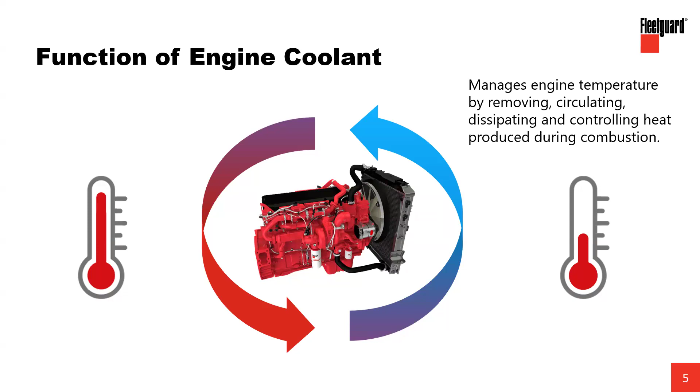Well, with a combustion engine, that combustion process generates heat. And so we need to remove that heat and dissipate it out of the system so that that engine can continue to run. If that engine is not being properly cooled, as many of you know, that engine will overheat and it's going to stop working. Things are going to break. Stuff gets very expensive to repair. So that cooling system is critical in making sure the engine does what it's supposed to do and lives that long, nice, healthy, productive life. So it's all about temperature control and keeping that system free of heat and removing it out of there.

So in order to do that, we've got to have the right combination of ingredients to give us that coolant product that's going to give that right level of performance. And so if we take a step back from the whole coolant conversation, I know some folks, I already had people emailing me saying, 'Can we please make sure we talk about color?'

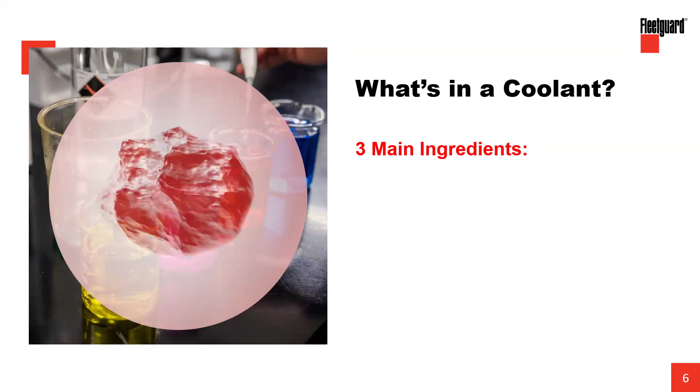Yes, we will get into color. But I want to start at a more basic level, with what's in an engine coolant. It doesn't matter whose product you're talking about, what brand, there are some basic ingredients that make that engine coolant what it is. There are really three main ingredients.

The first major ingredient we're interested in is water. Water on its own is really good at absorbing and conducting heat, so it's one of the predominant ingredients that goes into making a heavy duty engine coolant.

Now, your one watch out here with water is that there are a couple different types of products in the marketplace today. You can buy pre-mix coolant that already has the water mixed in at the appropriate concentration and purity requirements. That is our general recommendation, to use a pre-mix coolant that's ready to use. It takes a lot of the guesswork out of the equation. But coolant companies and blenders also sell a concentrate version of our coolant so that you can mix it with your own water supply.

It's really important to note that if you, or customers, are buying concentrate coolant and mixing it yourselves, water quality is very important. Don't assume that just because the water is safe enough to drink, it's going to give you the right performance outcome when mixed with a concentrate product.

Tap water has lots of different things added into it. I live here in Middle Tennessee, where we've got a lot of limestone in the ground, so generally our water supply is very hard. When you think about scale buildup around your faucets or shower head, that's an indication of hard water. If you're mixing hard water in with your concentrate coolant to get that final product, it can have some negative effects on performance. So water quality is very important, and that's generally why we recommend pre-mix.

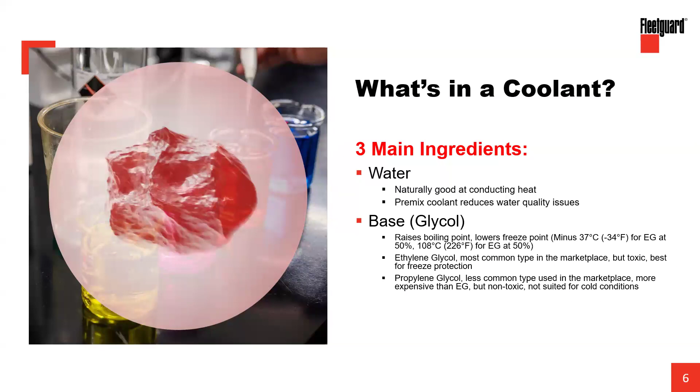Then the second ingredient we're interested in is the base, or glycol. If you've ever heard glycol referenced around heavy duty engine coolants, this is what we're talking about. It's the base of that coolant product. What the base, or glycol, does is take the natural boiling point of water and raise it, and take the natural freeze point and lower it. So it's giving greater thermal range to the capability of that coolant product. That's really about extending the limits of the temperature that coolant can see.

There are two main types of glycol, or bases, used in coolants today. The most common by far is ethylene glycol, or EG. If you've ever been looking at a coolant label and seen EG on there, that's just specifying the type of base being used. It is toxic, so that's the downside to an EG coolant, but it does offer the best freeze protection. If you're in an extremely cold weather area, an EG coolant is going to fare a little better than the alternative.

The alternative is a propylene glycol coolant, or PG coolant. They're typically less commonly used, and PG coolants are usually a little more expensive. They are non-toxic though, and that's the differentiator. Certain industries, such as food and beverage haulers, may have a requirement to use a non-toxic coolant product. Will and I visited a fleet this summer down in Dallas, Texas, that will be using a propylene glycol coolant because they haul food and beverage products. So there may be specific customer requirements that dictate needing a PG coolant. That's the main difference between those two.

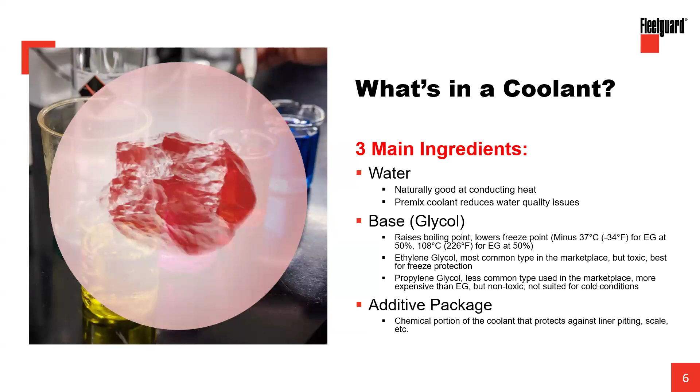That third ingredient is really a package of ingredients referred to as the additive package. This is where the chemical protective qualities of the coolant come into play, keeping the engine from experiencing chemical reactions that can negatively affect its life. This is also the ingredient that's going to be most different or unique between one brand of coolant and another - think of it as the secret recipe, the secret sauce of the formulation. There are certain things that additive package is designed to protect against, things like liner pitting and scale. We're going to look at a few examples here.

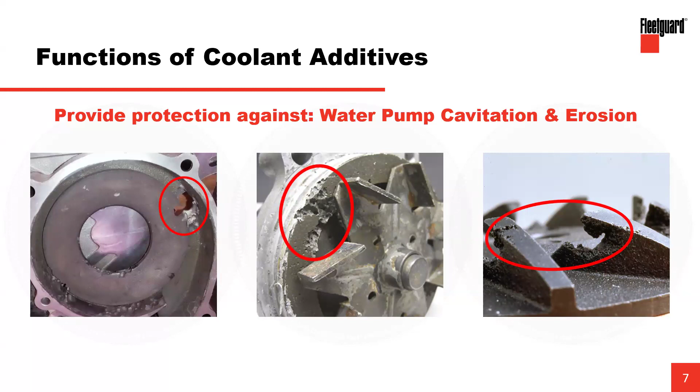One thing you should have protection against is cavitation and erosion, particularly with water pump components. If you've ever seen water pump impellers or housings where it looks like little bites and chunks have been taken out of the metal, that should be a red flag - an indication that the coolant product being used wasn't providing the adequate protection needed to keep that system healthy. What happens is as these impellers spin and circulate coolant, little bubbles form in the system, and they pop and implode on the surface of the metal, and under pressure take little bites and chunks out. If you're using a coolant formulated appropriately, that shouldn't happen.

That's something that's going to be protected against - those little bubbles will still form and burst, but there's a chemical coating that creates a barrier so they don't take little bites and chunks out of the metal over time. So if you're seeing a lot of this, or experiencing a common thread of premature water pump failures, that could be an indication to start asking questions about the coolant product you're using.

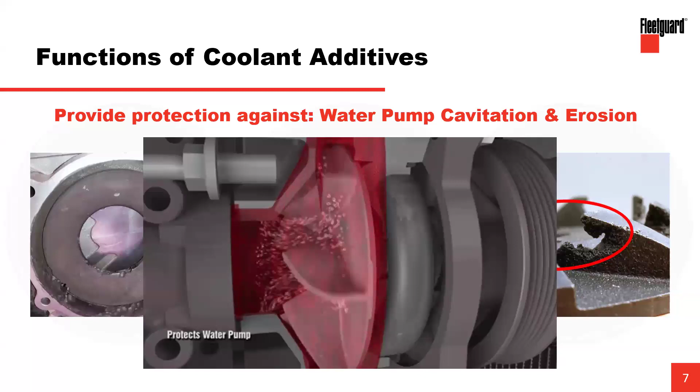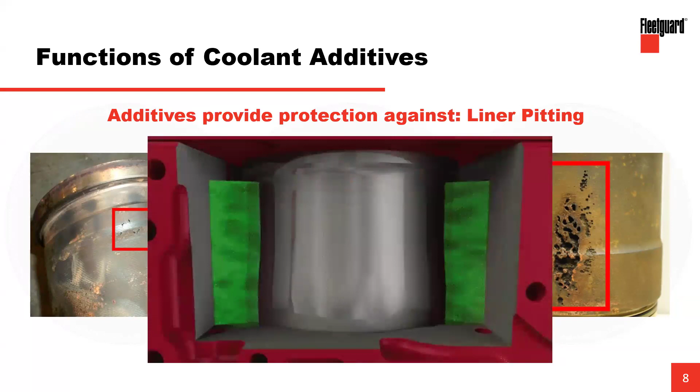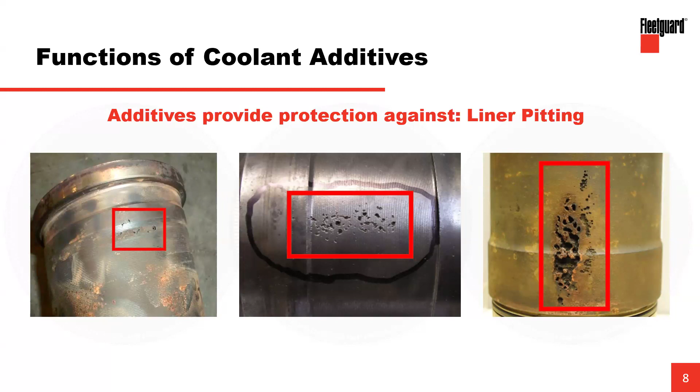Another thing we mentioned is liner pitting. This is a similar situation where by nature of the combustion process, you get vibration inside the engine, and on the cylinder walls you get a little bit of those same bubbles forming and bursting on the surface. If not protected against, that will continue over time, and you can actually eat your way through the metal, and then things start to mix - oil and coolant and so on. That could be an indication you've got some sort of failure occurring as a result of not having the proper protection from the coolant product being used.

So a couple things to watch out for. A question I'd want to know is: do these additives wear out? Are they being used up through the life of the coolant? And the short answer is yes - coolant does have a useful life, just like engine oil has a useful life.

Over time, as engine oil starts to break down because of oxidation, that oil used to keep contaminants and things we don't want in the engine in suspension. Over time, when those additives deplete and wear out, that's when your oil starts to clump up, clog up, and agglomerate into what you'd commonly refer to as engine sludge.

Similarly with your engine coolant, that additive package can wear out over time, and you need to make sure you're taking care of that coolant product. There are concentrated coolant additives called SCAs, or supplemental coolant additives. If you've been using Fleetguard products over the years, you'll commonly see those referred to as DCA, or diesel coolant additive. These are concentrated additives you can put back into the cooling system to recharge or replenish that add pack and keep that coolant protecting the system the way it's supposed to.

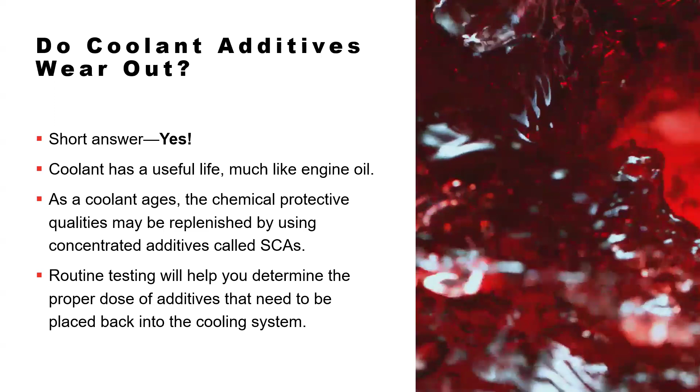Now, if you're not testing - and we know the industry isn't necessarily the best at staying on top of testing and maintenance - you really don't know what's happening inside that system. You don't know if you need to replace or replenish those coolant additives until maybe you start having problems. So we definitely recommend routine testing - that's really the only way to know what's happening inside the system, and it'll tell you exactly how many of those additives to put back in if you're using a coolant that requires these concentrated additives.

And if you're just guessing, is it possible you might be wondering, can I put too many additives back in? You can, yes, absolutely. This is an instance here on the left. You may have seen this if you've been around the industry a long time, where you see this gel-like substance forming up either in the water filter, the coolant filter, or possibly in the radiator parts of the cooling system. This is a result of too many additives in the system. So if we're just guessing and pouring concentrated additives back in the system without doing the math to understand how much we need, you can see something like this happen.

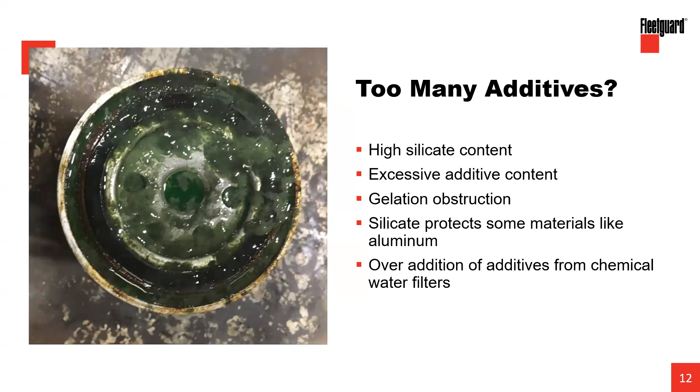Basically what's happening is like when you were a kid making a pitcher of lemonade, or I'm a 90s kid, so Tang was around when I was a kid. You can only put so much of that powder in solution in the water before it's no longer soluble, and it starts to clump up and agglomerate at the bottom of the pitcher. Same thing if you're making coffee. You can only put so much sugar in that coffee before you're just going to have sugar sitting at the bottom of the mug. So that's basically what we're talking about here, and if you've ever seen that, that's an indication we're putting too many additives back in the system.

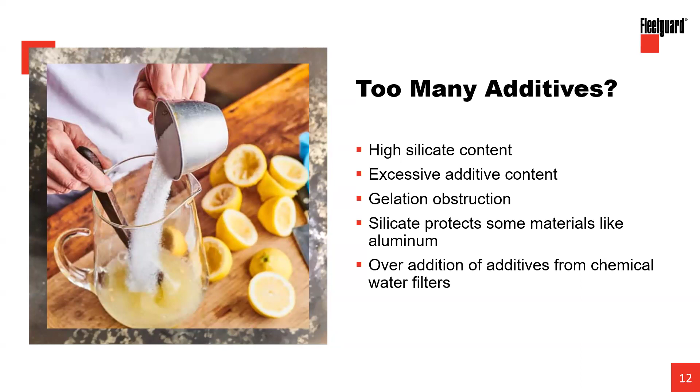So let's get right to it. Color. I literally had somebody email me before the call saying, please make sure you talk about color today. So if I were to ask you guys, feel free to drop in the chat, which coolant color is the right coolant color to be using in a modern diesel engine, what would you guys say? I'll give you a second to put that in the chat window or the Q&A window. All right, I got one vote for blue. Any other guesses?

All right, well the answer, of course, is any color, right? Color doesn't really matter. I see red, I see 'depends on the manufacturer.' Yeah, color doesn't really matter all that much. Color is not standardized across the industry, and many different manufacturers will use different colors depending on the application and the type of product being used. So it can become a very dangerous practice to service and maintain diesel engines based on color alone. If a vehicle comes in and has orange in the system, is it safe to just put any orange back in? Not necessarily, right? I would say that's not a good best practice. There are a few things you'd want to know, like looking at the label of the product or the safety data sheet, to really understand: is this the right product I should be using, and is it compatible with the product that's supposed to be in the system?

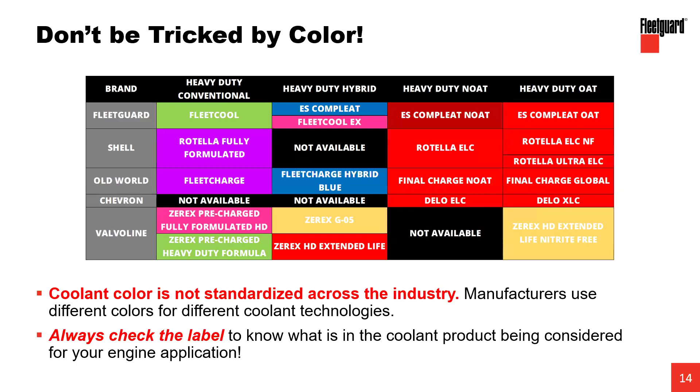We're going to talk about a few of those things today just to level set and give good objective information for the next time you choose a coolant for your application, or help a customer find the right one. There's a few things to look for. I've got on the screen a few brands that are out there in the marketplace today, specific to North America. You can see sometimes there's a little bit of consistency with the color across types, but it's not really something that's reliable. This is another look from a document I got from one of our OE friends here in North America, and you can see, based on the columns running top to bottom, the different types of coolant products and the different colors out there. You'll notice the variety of makes and types of coolant in the marketplace, but certainly a variety of colors as well.

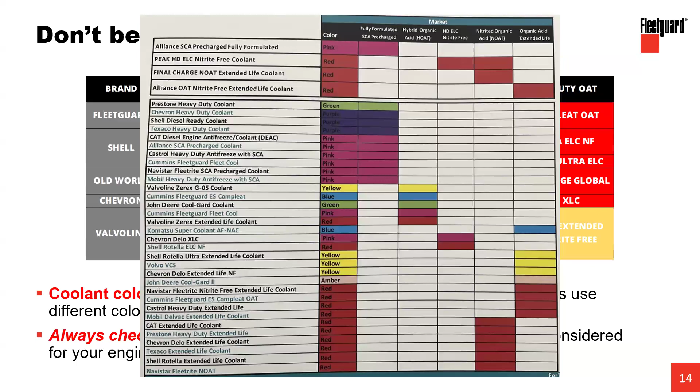And so, just going on color alone, not a good best practice.

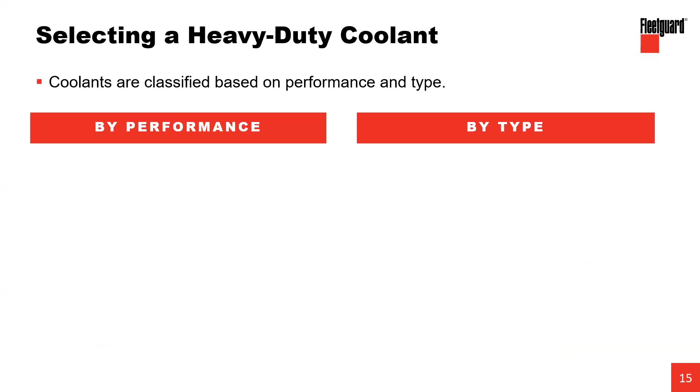So a couple of ways we can look at all of those coolant products that are out in the marketplace today and break them down is by looking at them one of two ways. One way is by performance, which we're going to come back to, but the other is by type.

These are just generic names, generic terms used in the marketplace today to group coolants based on the technologies used and the way they're formulated. So a conventional coolant, also called a legacy coolant. You get into hybrid coolants, also referred to sometimes as ELC, or extended life coolants. And then the more modern types with organic acid technology coolants, or OAT coolants, as they're often referred to. There are some variations of those out there as well. But this is a way to talk about technologies, these type names.

Performance specifications, though, we're going to circle back to that and get into that next. These are actual specifications that tell what type of coolant it is or where it's compatible, based on actual rules and specifications. So there are industry specifications. One of the governing bodies out there is called the American Society for Testing and Materials, or ASTM. They would be similar to an ISO group out there, or SAE group. They don't just work with coolant; they work with all sorts of different things. But they set industry standards, and we're going to look at one of those ASTM numbers next.

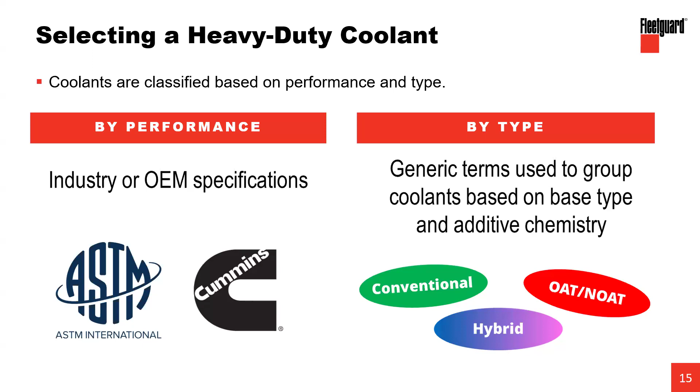Cummins, though, just like Cummins or Detroit or Caterpillar, any of these engine OEMs, people that actually manufacture engines or powertrains, they often have their own specifications as well, which build on top of an industry spec. So let's go look at those next.

So again, this is an industry specification, the industry specification for a heavy duty diesel engine. What this says is, hey, this coolant has been formulated and meets all the requirements of a heavy duty diesel application, and specifically calls attention to protection against liner pitting and that scaling that we talked about, things that are common to heavy duty diesel engines. So this is the bare bones minimum spec, regardless of what brand or type of coolant you're using.

If it's a heavy duty diesel engine, you need to look at the label of that product. Look at the jug. Look at if it's coming in a drum or tote, or again, if you can look at the safety data sheet. If you do not see D6210 anywhere on that, that should be a red flag that, hey, this product may not necessarily meet, or probably doesn't meet, the industry specification for a heavy duty diesel engine.

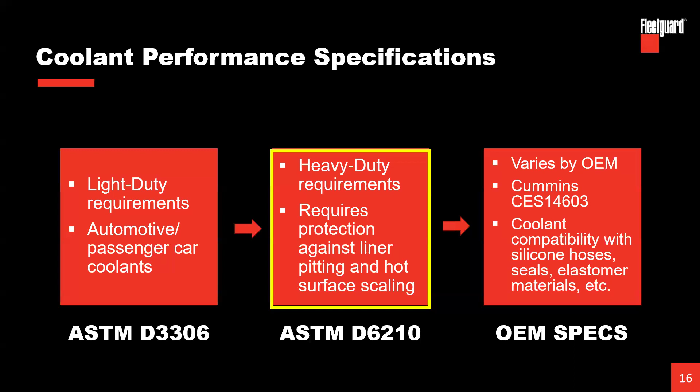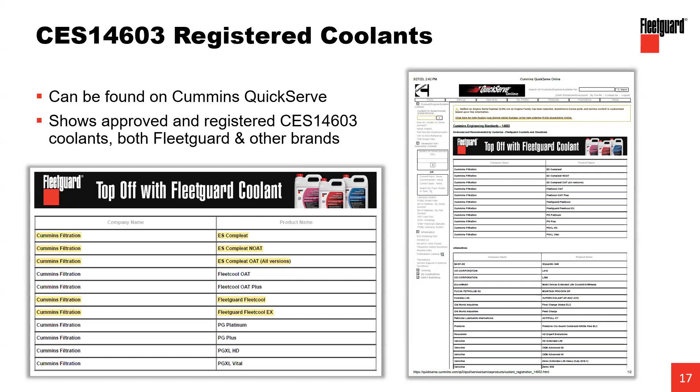So, where would I know to go look for a list of coolants that do meet that Cummins CES 14603 spec? You can actually go find this out on Cummins QuickServe. I know we've got quite a few folks on the call from the Cummins channel here in North America, across US and Canada. If you're not sure where to look, reach out, we can get you pointed in the right way. There is a list of products, not just Cummins, not just Fleetguard products, but all coolants that are registered to meet that specification. That would be a place you could go look.

So, why does Cummins call attention to compatibility with silicone materials? This is one of those things you can look for on the label of the product, look for on the safety data sheet of the product. It is one of the ingredients that is commonly used in formulating that additive package we talked about, right? That third ingredient, the additive package with different ingredients, this is one that's often used out in the industry today.

It is called 2-ethylhexanoic acid. I know that's a mouthful. Learn that, that's a good $64 word you can use at your next dinner party to impress your friends. 2-ethylhexanoic acid, what's the deal here? Why is it not recommended? Well, it's known to be extremely aggressive on silicone materials, which are often used in modern diesel engine cooling systems.

So when you think about hoses, head gaskets, seals, all those things we just talked about in the Cummins specification, 2EH is really aggressive on that stuff. Silicone is a material which is an elastomer, it should be nice and flexible and bendy. And 2EH essentially goes to work on that material and causes it to lose that flexibility and causes it to kind of shrivel up and shrink up.

Some red flags would be if you've ever seen any of these materials, hoses especially, that have a lot of cracks and start disintegrating basically from the inside out. That would be a red flag to know, hey, the coolant I'm using, does it have 2EH in it? And should I be avoiding that? Something to be on the lookout for.

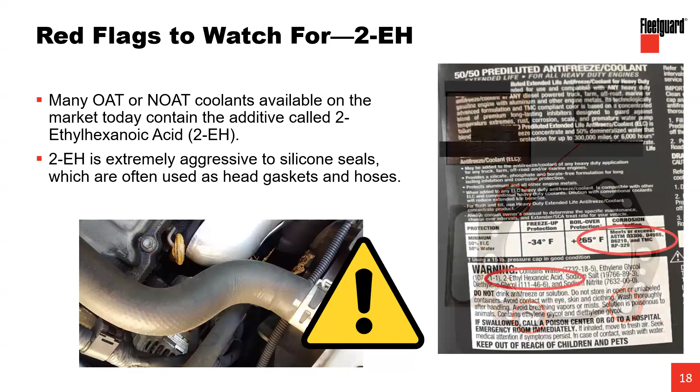Again, this is one of those things you can look for on the product label. Sometimes it will actually be listed in the ingredients. Sometimes the coolant company, the blenders, the people selling the product, will try to be a little trickier with it, where they'll say proprietary ingredients, and you can kind of dig into that a little bit more, and that's where you'll find 2EH. Will, feel free at any point if you want to drop in the chat some notes on any of this stuff, I think that's helpful for everybody as well.

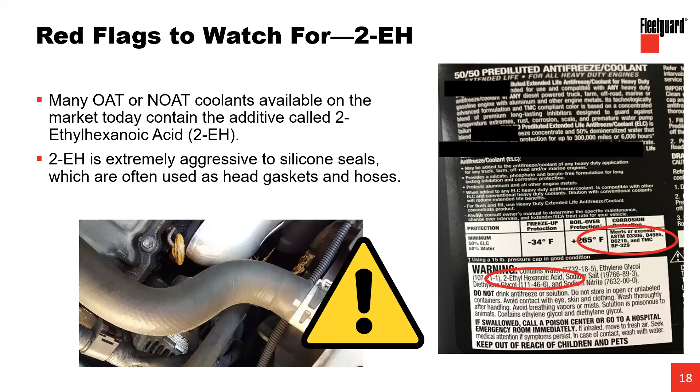Another red flag, something else we see very prevalent here in the North America market, is recycled coolant. Hopefully you guys have not run into this stuff before, but this is something we do see in the North America market. Typically these are being sold as very low cost solutions. One of the other things we often see with these are generally smaller companies that will approach customers offering to take away their used fluids, their old oil, their old coolant. And when they do that, they're basically taking it back and not really properly going through the actual steps to recycle the coolant and make it usable again in the future.

So if you can imagine one of these operations going to a dozen different sites, taking everybody's old coolant, going back and basically putting it into the same pot, not really handling that properly, and then redistributing it, you're not only not getting the things you need in that coolant product, you're also getting a compounding effect of all the negative stuff batched together from all the other customers they're picking up from. It really is a nightmare product.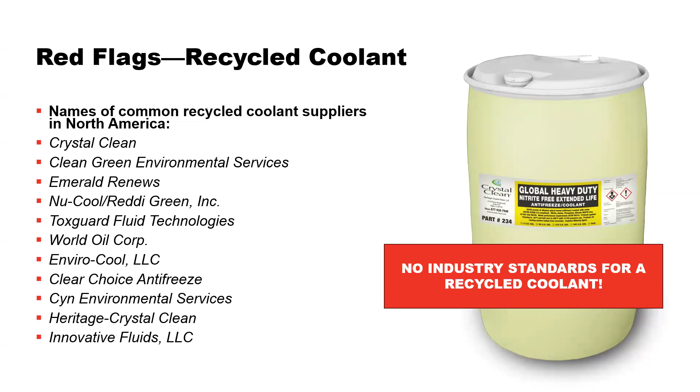What are some common issues that can happen if you're using one of these? What we see, some of the things listed here on the screen: premature failure of things like radiators, EGR coolers, other components that have aluminum as part of their composition. As we mentioned with the 2EH, silicone materials, so hoses, heater hoses, seal failures, head gaskets, we typically see that. Water pump failure is something we usually see with recycled coolant.

You've got rapid pH drop, which is an indication that the coolant is becoming overly acidic. And once it's got a lot of acid content in there, the acid's going to start going to work on your steel and cast iron components. So if you start noticing the color of the coolant changing to kind of a brown rust color, that might be an indication this is taking place inside the cooling system and inside the engine block. And of course, once you get to that catastrophic engine failure level, you're talking about total engine rebuilds. Very, very, very expensive.

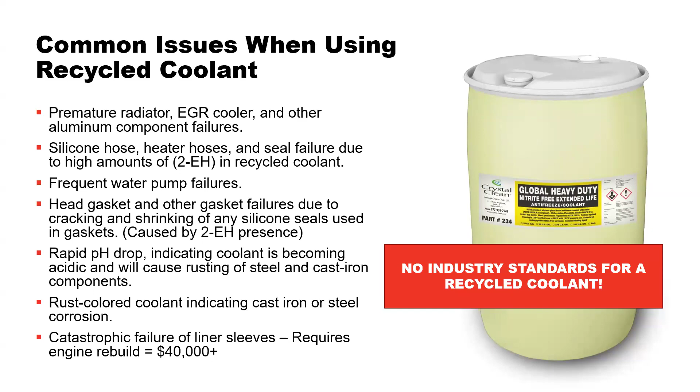Something else to watch for: we know folks out there tend to be very price sensitive, cost sensitive, looking at the top line of their business trying to reduce cost. So sometimes we still see these legacy coolants out there classified under an industry standard, but a different one than what we're interested in, the D4985 standard. This is basically the old school way to get a heavy duty engine coolant, an automotive grade engine coolant that you have to add supplemental coolant additives to at the first time of use to turn it into a heavy duty engine coolant.

And so what a lot of folks do, it's just like when we were in school, we start working on the worksheet before we actually read the directions, people will see heavy duty on the label and just pour it right into the cooling system and go off to the races. They start their engine and go, and they have not actually done what they were supposed to do to turn it into that heavy duty engine coolant. Now they think they're getting heavy duty protection when they're really getting light duty protection.

OEMs do not use this stuff today, they have moved on from this. So the recommendation here would be you really should move somebody away from this if it's a product they're still using. Again, this is something you'd be able to look for on the label, that D4985 specification. If you do not see D6210 anywhere on there, that's something you'd want to pay attention to and know this is not really formulated to be a heavy duty engine coolant.

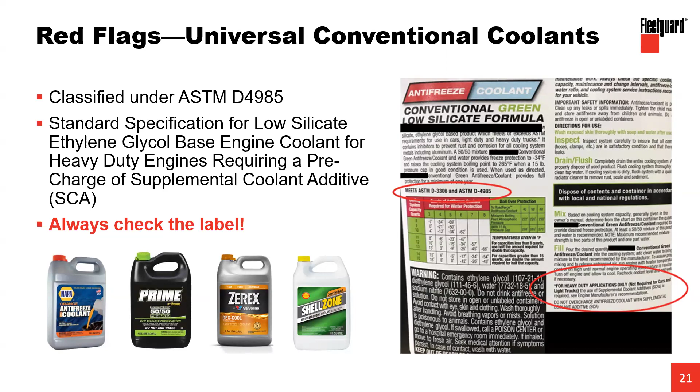All right, so we've talked about specifications, we've talked about some things you can look for. Let's talk about coolant types and continue to break that down a little bit. So conventional coolants, right, these are oftentimes also referred to as legacy coolants.

Generally speaking, these are still kind of your green coolants that are out in the marketplace today. Over the counter pricing usually is the lowest, so oftentimes people are using these because they're either familiar with them since they've been around the industry a long time, it's what they grew up on, or somebody else educated them, and it's cheap. These are coolants that, while they can be useful, you can still use today.

We sell a conventional coolant with our Fleetcool product. They do require a lot of hand holding, so they typically have the shortest service interval and require more maintenance than other types of coolants. If you really want to get the benefit out of these products, you really have to watch them a lot more closely. From what we've seen throughout our experience in this industry, most people are not watching their coolant maintenance very closely, so probably not the best solution. From a technology perspective, there are better technologies out there.

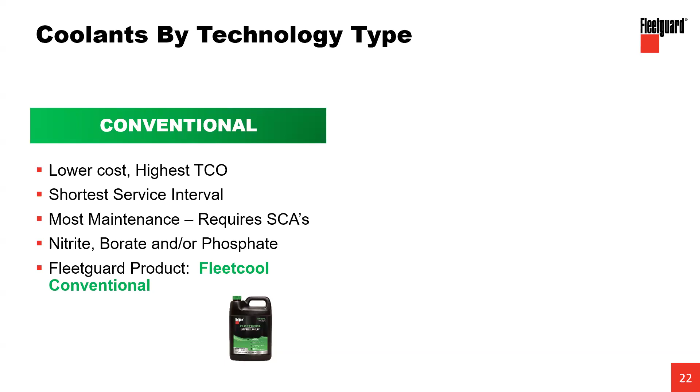That moves us up to our next category, which are called hybrid coolants. Sometimes they're referred to as ELC, or extended life coolants. They're a pretty significant jump up in terms of technology, protection and life compared to a conventional coolant, but there are even still some better options out in the marketplace today. The reason they're called a hybrid is they take some of the good things about a conventional coolant and blend them with some of the other technologies out there, and that's where you get a little bit of that hybrid name from.

The Fleetguard coolant products that fit in this category would be your ES Compleat. For those folks who have been around Cummins engines a long time, and maybe around Fleetguard a long time, who know of the blue coolant, that is our ES Compleat coolant. We also offer a Fleetcool EX product. That's maybe a little bit more of a niche product for kind of legacy Detroit engine applications, but both of those fall into our hybrid category.

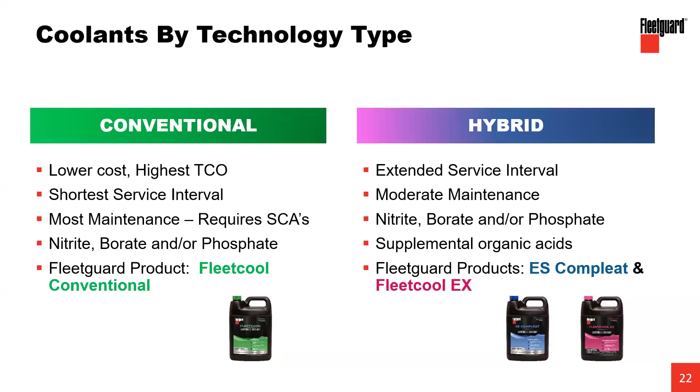That moves us into our organic acid technology coolant. I think somebody dropped in the chat what NOAT stands for - that's a nitrited organic acid technology coolant. The two products we offer in the OAT family today are our ES Compleat OAT - that's the product on the right - and then we have an ES Compleat NOAT, which again is a nitrited organic acid technology coolant.

The nice thing about an organic acid technology coolant, and why OEMs are factory filling with these today, is they offer really the best protection in terms of that additive package we talked about. They also offer the longest life and really the least amount of maintenance. So as you think about whether you want a product that's maybe cheaper on the front end but requires a lot to get the performance out of it - that's what you see more on the legacy or conventional side - versus these OAT coolants on this end of the spectrum: yes, they're a little bit more expensive, but in terms of life of the product you get a much longer lasting product, one you don't really have to babysit very much, and it gives you really great performance in terms of protection.

One thing to point out here on the nitrited OAT, the NOAT coolant, you'll see it's EC1 compatible. EC1 is that Caterpillar performance specification - we talked about those OEM specs earlier, and CAT's is EC1. So that NOAT coolant was something we formulated really to provide benefit for anybody using CAT engines who wanted a Fleetguard coolant that would be compatible.

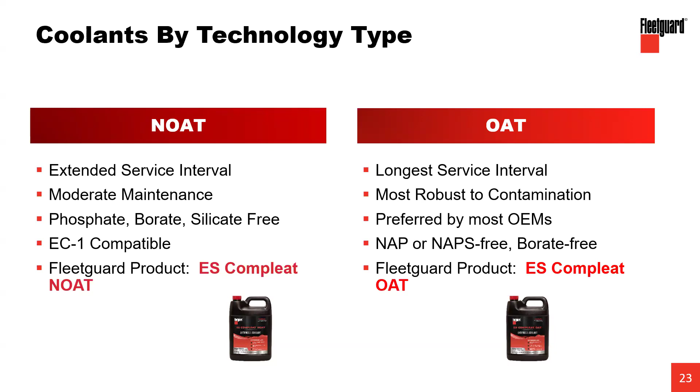These are all heavy duty right out of the container. They all do meet that industry standard, that D6210.

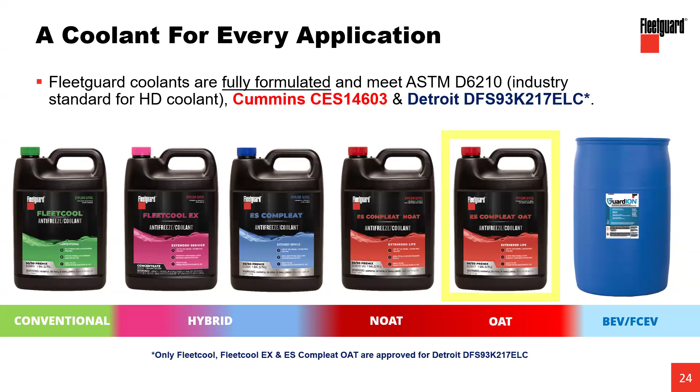So just to talk a little bit about ES Compleat OAT, again, I think there's a lot of benefit in using this product. It is a 1,000,000-mile life of the engine coolant, in off highway space, 20,000 hours. And the kicker here is you do not have to use any supplemental coolant additives or extenders with that product. So in terms of a product where you can kind of just top off and go, this is a product that you would do that.

So we're going to talk on the maintenance side of things in a few minutes about test strips and adding SCAs back in and all that stuff. And if all of that sounds confusing, or maybe is too much hassle, just use ES Compleat OAT, and you don't have to do that stuff. So it kind of makes life a little bit easier.

One of the other things we really like about it, you'll see that first red line across the screen, suitable for all makes and all models. This is a coolant that, because of its formulation where it is nitrite, amine, phosphate, silicate free, it does not have 2-EH in it. It's borate free. This is a coolant that is formulated to work very well across light duty, medium duty, heavy duty, high horsepower. You could put this in a passenger vehicle, automotive type application. Works really well across the board.

And the main reason for that is it's formulated to be very compatible with aluminum. So as we're moving to a little bit lighter applications, even on the heavy duty side of things, there's more aluminum being used. So we talked about heat exchangers, all those types of things. This is a product that works really well with that.

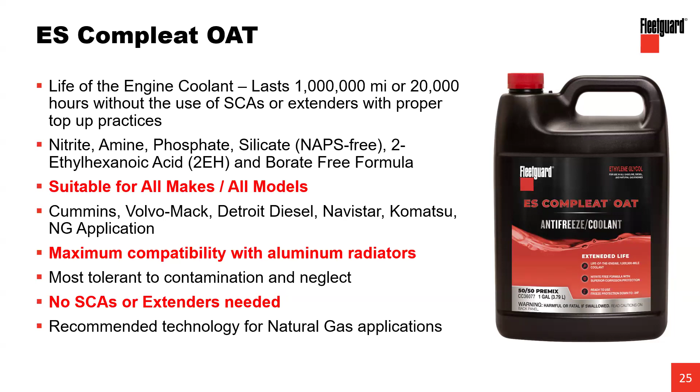And so we've seen a lot of benefit for customers that may have been carrying multiple types of coolant in their shop, because they're taking care of several different, they've got kind of a mixed fleet of vehicles or mixed fleet of equipment, forklifts, skid steers, all kinds of different things. This is one that you can basically consolidate all that inventory down into one product and use across the board with all of your applications. So it makes life a lot easier. Really a great product. We could talk more about that. If you've got more questions on our ES Compleat OAT, that's a product we really like, and we've seen customers get a lot of benefit out of using and switching over to.

So we're going to shift a little bit, pivot here with a little bit of our time and talk about maintenance. So let's get back to what we talked about earlier with, do coolant additives wear out? Do they deplete? The answer is yes, like we said, they do over time. So if you're using a coolant that does need to be replenished with supplemental coolant additives, you can buy concentrated additives. So these are some of the part numbers we've got here on our screen from a Fleetguard perspective.

So again, we've got those DCA or diesel coolant additive products. DCA2 is what you would use for Fleetcool and Fleetcool EX, or if you're using a coolant that has nitrite in it.

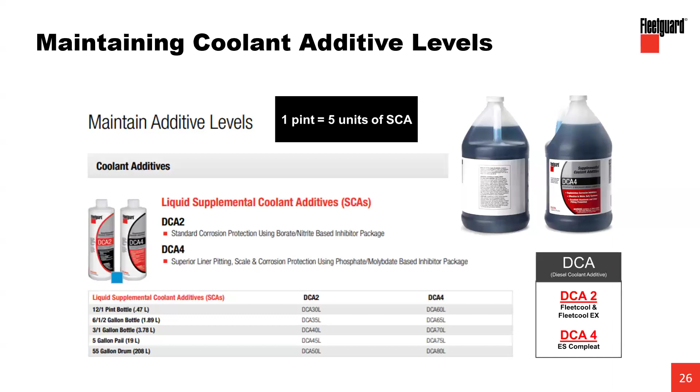DCA4 is the product you would use for our ES Compleat or our blue coolant. That's one where you'd be using a phosphate or molybdate inhibitor package. But if all of this sounds like a lot to keep up with, and you're not sure exactly what you should be doing, if you move over to ES Compleat OAT, you don't have to worry about this stuff at all. It kind of goes out the window.

So how often should I be testing to know if I need to be adding SCAs back into the system, or what's going on there? How often should I be testing? This kind of points out the differences between these types of technologies.

If you're using one of those conventional or legacy coolants, really you should be testing at every oil drain. So that could be pretty frequent, depending on what that drain interval looks like for your application.

If you move up to one of those hybrid or extended life coolants, that number jumps up to about 150,000 miles. That's 240,000 kilometers, 4,000 hours, or annually, whichever comes first. So a pretty significant jump there from a conventional to a hybrid.

But then you can see the real benefit of using one of those organic acid technology coolants, where that number jumps all the way to 300,000 miles. So we don't even need to test it until we get to 300,000 miles, or 480,000 kilometers. So really a significant jump there.

If you hit those numbers before the course of 12 months rolls over, then do that. If it's a static piece of equipment like a gen set or something like that, at least once a year you should be testing that system to see what's going on inside.

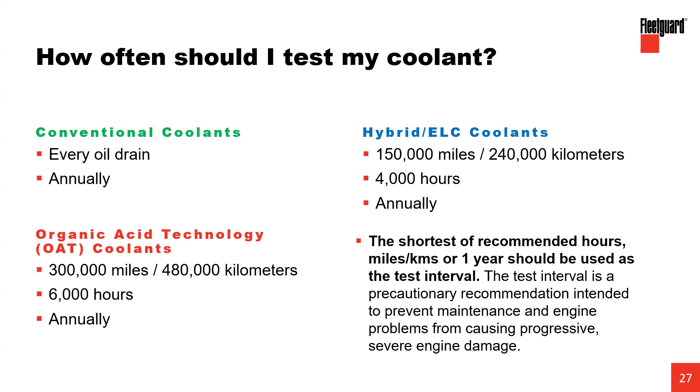So how do we actually go about the testing process? A couple of things that you can test for. One of these here is our Quick-Chek three-way test strip. Really the main thing we're testing for in this test is pH.

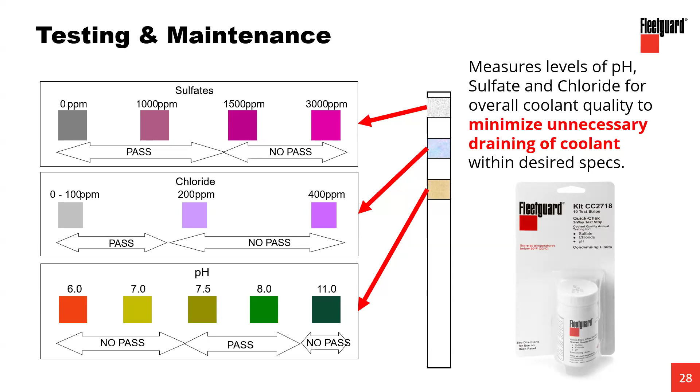We mentioned about the system becoming too acidic earlier. Well, it could become too acidic or it could become too basic. If it's not in the middle of where that should be, it's not good on either side of the equation.

This is really kind of your canary in the coal mine test. So think about maybe you've got a piece of equipment that has not been tested in a long time, or you bought a used truck or used vehicle or used piece of equipment. You have no idea what's in the cooling system, but you're not necessarily wanting to drain the system out and replace. You can test with this Quick-Chek test strip and see what the pH looks like. And if that pH is out of balance, if it's way out of spec, you really are in a drain and replace situation. So rather than going through a bunch of other things, just start here, and that pH will tell you what you need to do next.

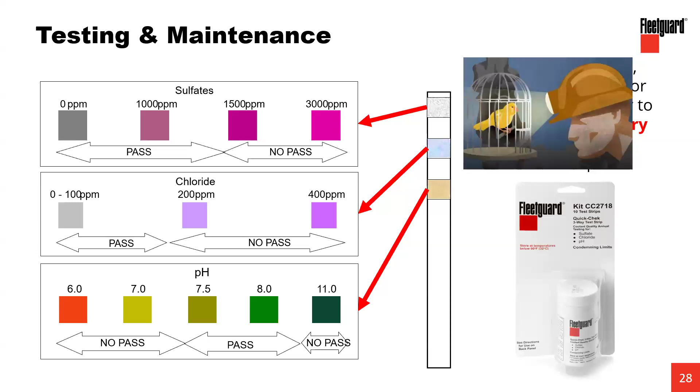Beyond that, we've got a YouTube video that walks you through exactly how to do that in about 3 minutes. Super easy. The next thing you can look at is water quality.

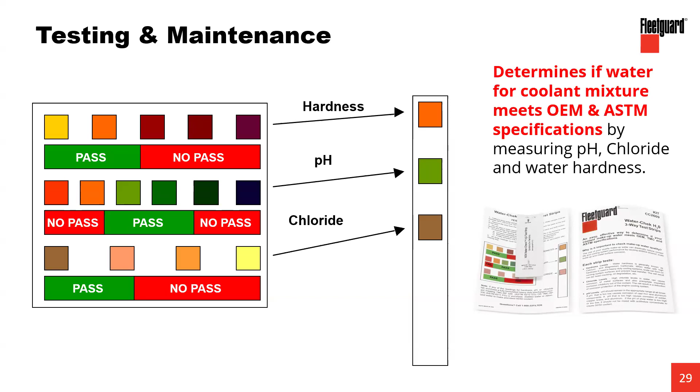Let's say you are a customer, or you've got customers that buy the concentrate coolant and want to mix themselves. They really should be using these test strips. These water quality test strips are going to test water hardness, pH, and chloride. It's just a simple pass fail, and that's going to tell you whether this water is safe to use in mixing with that concentrate product to get finished good coolant.

Again, there's a YouTube video, less than 2 minutes. It's going to tell you exactly what to do.

So pretty handy there. This would be used on any coolant containing nitrite, not necessarily limited to just Fleetguard coolants with nitrite. These are going to work pretty well with other coolants that have nitrite in them. Again, the YouTube video will walk you right through that process, and it's pretty straightforward.

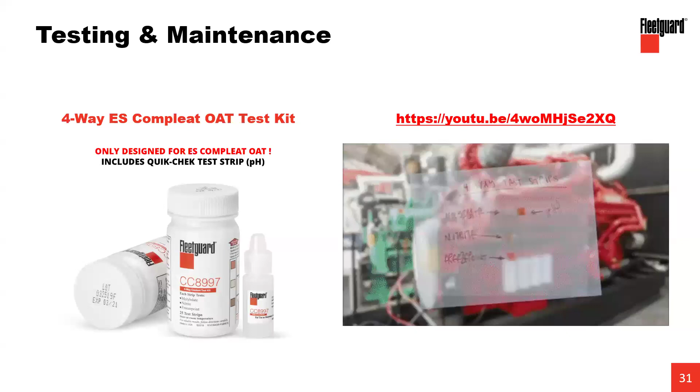Now, let's say you are using our ES Compleat OAT. There is a 4-way test strip kit that comes with that. It's testing, again, for freeze point, nitrite, molybdate, and it's also testing for pH. So this one kind of does it all. This is really specific to ES Compleat OAT because OAT coolants are a little bit more unique in the marketplace.

We can't verify that this is going to work great with other people's OAT coolants, but it definitely will work with our ES Compleat OAT because that's what it was formulated to do. So the YouTube video, pretty straightforward, will walk you through exactly what to do there. Makes the process really straightforward and simple.

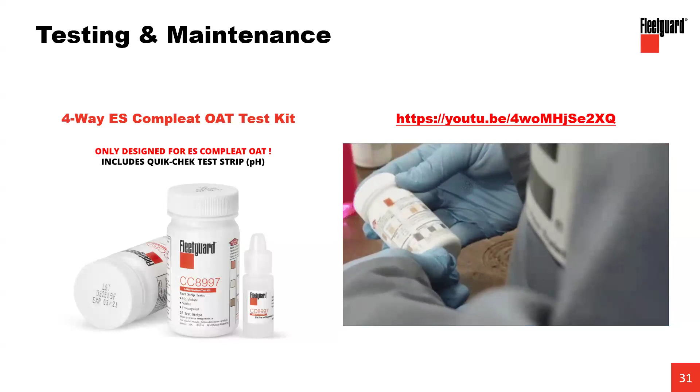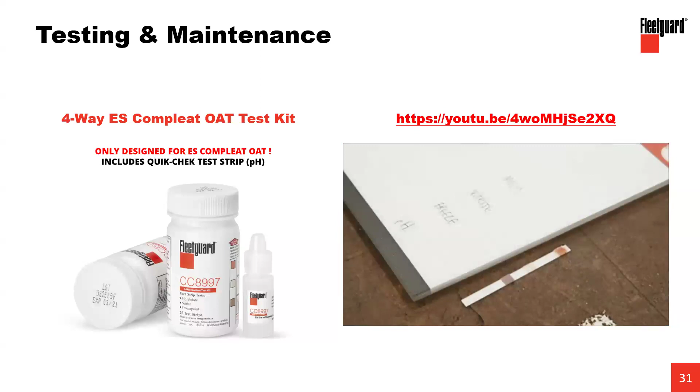And again, when you use this, it's really just telling you, hey, do we need to add more coolant back in the system? Top off with new or dilute, whatever we need to do there. But we're not going to use any supplemental coolant additives, so it kind of takes all that stuff out of the equation. That would be one thing to pay attention to with ES Compleat OAT.

And then the last thing I've got here is, from a testing and maintenance perspective, the refractometer. If you've never seen one of these little guys, but you live in a cold weather climate, somewhere where it gets really cold during the wintertime, a lot of snow, sub-zero or sub-freezing temperatures, that kind of thing, we really do recommend that you should have one of these and know how to use it.

Basically, what you're doing is taking a little sample of your coolant and putting a little droplet on the lid there. You'll flip the lid down, and then you look through the viewfinder side of it, kind of like a little scope or periscope, and your readout's going to look like what you see on the right side of the screen. So it's basically telling you, hey, is this coolant where it needs to be for proper freeze protection?

Making sure you have that cold weather protection is really important. It's also helpful, though - I know sometimes we talk about freeze protection, but also for that boil over protection as well. That water can evaporate out of your coolant, and if you don't have the right combination of water and glycol together, that affects the thermal stability of that coolant. So something to look at and take attention to.

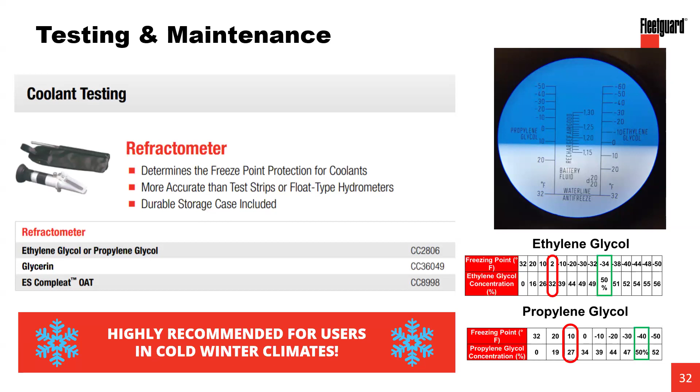You'll notice some of the part numbers there. If you are using the ES Compleat OAT coolant, again, that CC8998 is specific, in terms of the readout, to that ES Compleat OAT product. So that's just something you would want to pay attention to if you're using ES Compleat OAT. Again, the YouTube video, 4 minutes, walks you right through it.

The last thing here is on water coolants, water filters or coolant filters, however you want to call them. There's a combination of these things out here - you can get them in standard service, extended service. There are chemical versions of these as well. On the standard side, it's an immediate release where it recharges with pellets of that diesel coolant additive that will replenish the system. And then on the extended service, it's kind of a slow release version of those chemical pellets.

This is important - remember, if we go back and we're doing testing and it's telling us, hey, you need to put this many units of SCA back in, be aware if you're pouring concentrated additives back into the cooling system, you also want to keep in mind if you're using a chemical water filter or not. Otherwise we can get into a situation where we're putting too many additives back in the system if we forget we've got a chemical water filter on.

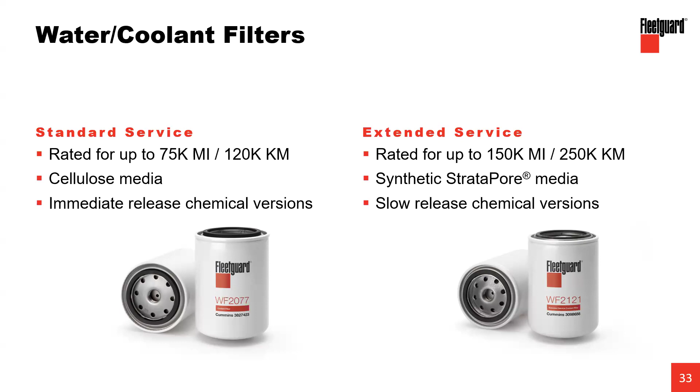Same thing if you're using that OAT coolant. If you're using that organic acid technology coolant, you would not want to use a chemical water filter. You want to use, oftentimes people call it a blank, but really it's just a non-chemical version of that water filter. So something to pay attention to.

On the cleaning side of things, let's say you get an engine that's got a lot of buildup inside. You maybe have some corrosion, some rust, or you get that silicate gelling. We do have some cleaning products.

The main thing you want to pay attention to is what type of contamination you have. If you have a soft contaminant like a silicate gel, or some sort of oil, grease, or fuel contamination in the cooling system, that's when you want to use Restore. If it's an abrasive type of contaminant like rust, scale, or solder bloom, that's where you're going to want to use Restore Plus.

Main thing to pay attention to here: these are active cleaning agents. You don't want to pour this stuff in your engine or cooling system and go off for a long weekend and come back—you're going to find a big mess. The recommendation is about 2 hours in the system, letting it circulate, and then you want to flush that stuff back out. This isn't something you want to leave running in there for 12 hours. Just 2 hours, then get it back out and flush the system.

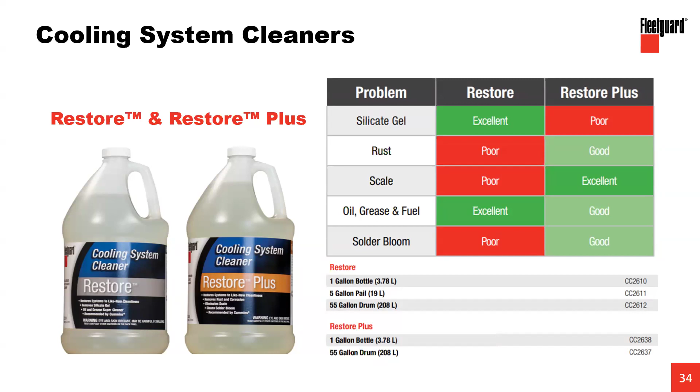All of our Fleetguard products—everything we've talked about today, filters and coolant—are backed by a non-prorated warranty, which means if our product causes engine failure or engine damage, we really put our money where our mouth is. We're going to either repair that engine back to working condition, or in the event it's more cost effective to buy you or your customer a new engine, we do that. And it's not prorated by mileage or hours. It really is the best warranty in the industry, and we stand behind that because we believe in our products so much.

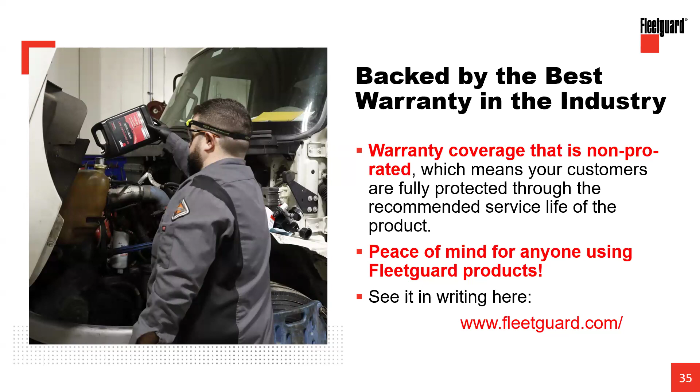So if you're curious to see more about that, you can check it out on the Fleetguard website, fleetguard.com. I think, in my opinion, we have probably more coolant-related materials on fleetguard.com than any of our other product lines we sell. We've got a coolant selector tool that takes you through some questions and tells you which product we'd recommend from a coolant perspective.

Training is a big part of what we do. Obviously we do webinars like this, but I've mentioned the YouTube channel several times—go to the Fleetguard YouTube channel. Lots of great coolant-related videos on there that are kind of how-to. We'll walk you through exactly what you need to do to use these products correctly and make sure you're getting the best total cost of ownership out of your experience.